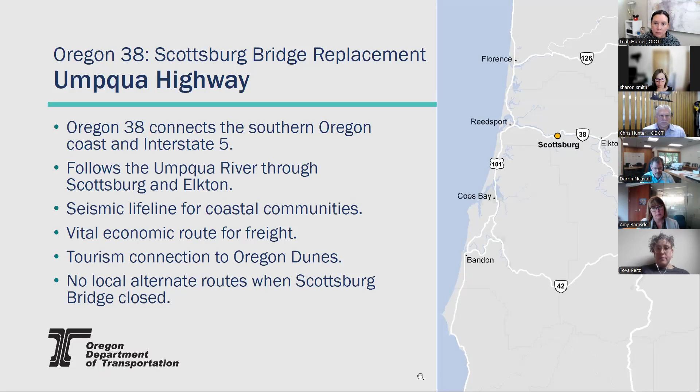Location-wise, it's just 16 miles west of Reedsport, right along the Umpqua River, in the community of Scottsburg, which has about 200 people. There are neighborhoods at the north end of the bridge, and this is a very steep, vertical area on both sides. We'll talk a little about that in the design.

Also, if you look in the right-hand corner picture, you'll see a boulder. There were a lot of those in the river. As we were investigating this, we noticed those came from the hillsides and had come down through the years, so there was definitely evidence of past earthquakes and slides through this area.

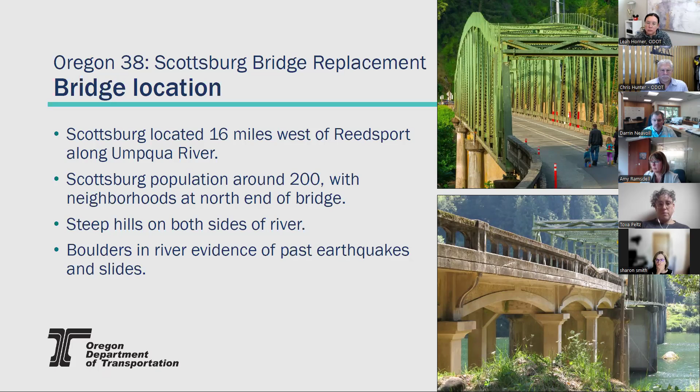So what was the problem? It was originally built in 1929, with little space for bicycles, pedestrians, and even two-way traffic. It was tight for two-way traffic through there, especially as you enter the bridge. Crashes required bridge closure for repair, and even maintenance work sometimes caused us to close it because we just didn't have the room. The bridge was also vulnerable to earthquakes—it just wasn't built for that.

On a personal note, I'd say it saved my hearing probably, because my wife, every time we took our camp trailer across there, would be hollering at me to slow down or move over. Our maintenance crews constantly picked up mirrors and awnings off this bridge because camp trailers would hit either the bridge or a passing vehicle and lose their mirrors or awnings. We even had awnings down in the river. It was a real problem.

The crash you see in the picture happened in 2014-15. This closed the bridge for about a week. We were very concerned about whether it would need to be weight restricted after it hit, because it hit so hard. This really was the last big crash that got people around the area concerned about needing to do something with this bridge.

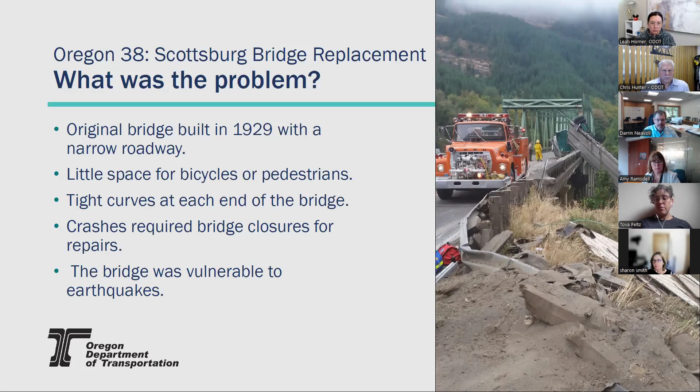All right, next slide, I think. I'll let Chris take on what we did, what the solution was, and how we got there. So as Darrin explained, this is a rural area with a tight corridor.

We were looking at this, and it did have tight corners into this bridge. So, even because of the size of it, we did a value engineering process, looking at alternatives for what we should do with this structure. As House Bill 2017 came in, it provided funding so we could actually replace the bridge rather than continue just providing repairs and maintenance. We had the value engineering study, and there were 50 plus different ideas that we vetted through the process—several of those we did implement.

There were also recommendations to replace the bridge with a more modern bridge, a wider deck, and standard shoulders to accommodate all modes of traffic, which the prior bridge did not have. The new alignment was meant to take out some of those sharp curves we had on both ends, but also to provide clearance for maritime traffic. We had to coordinate quite a bit with the Coast Guard and others to make sure we were meeting their requirements.

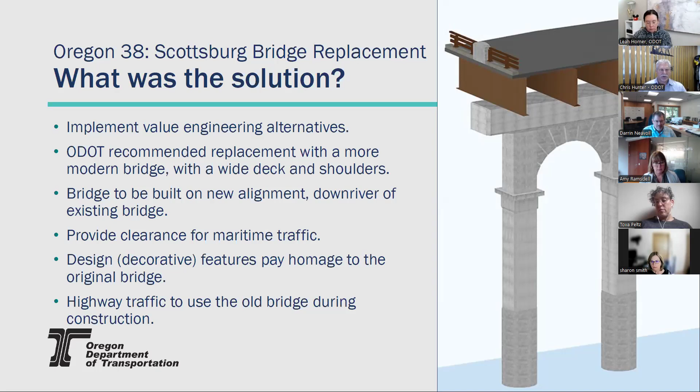This is just an overview of what that looked like. The green was the old original Scottsburg Bridge, the 1929 bridge. It's kind of to scale, so you can see how narrow that bridge was in comparison to the new bridge on a new alignment.

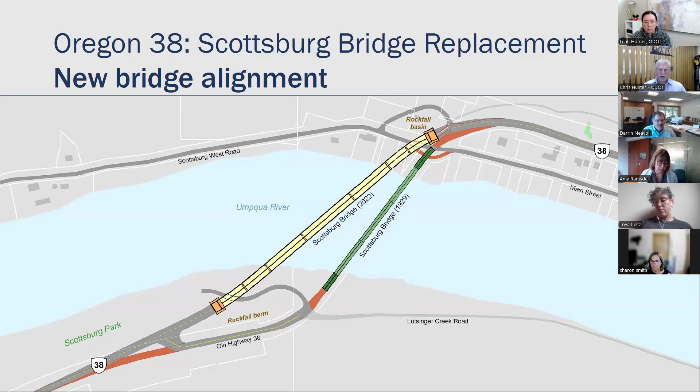With our design, we were able to completely build this new structure, the approaches, the attachments, pretty much everything, prior to opening up the new bridge and decommissioning the old bridge.

For the project scope, we built a new bridge, and when they did that, there were two temporary bridges that needed to be constructed. This picture shows you one of them, the temporary bridge used to build the new structure. But we also had to put in temporary bridges to decommission the old bridge, downstream of the old bridge and upstream of the new bridge. We had to shoehorn in a couple additional work bridges when it became time to remove that existing structure.

On the south end, the lower left of this structure, we had to realign our highway to meet the new alignment of the new bridge, but also tie in Lutsinger Creek Road, which is on the right side that continues up the river. We did some modifications on the north end as well, because Scottsburg West Road and Main Street come under the bridge, and there's also a little shoofly you can see. We had to build a retaining wall and make some modifications up there to accommodate local traffic within the community.

We also utilized what we call deep soil mixing, basically stabilization of the existing ground, where you drill down into it and inject grout and cement to firm it up and make a solid base. We did that to help with liquefaction issues during a potential seismic event. Being along the river with this type of soil, we need a really good foundation, so we looked at various types of foundations and landed on deep soil mixing to stabilize and create this foundation using the existing soil with additional grout to make it solid and no longer subject to liquefaction, so the foundation of the structure would remain in place.

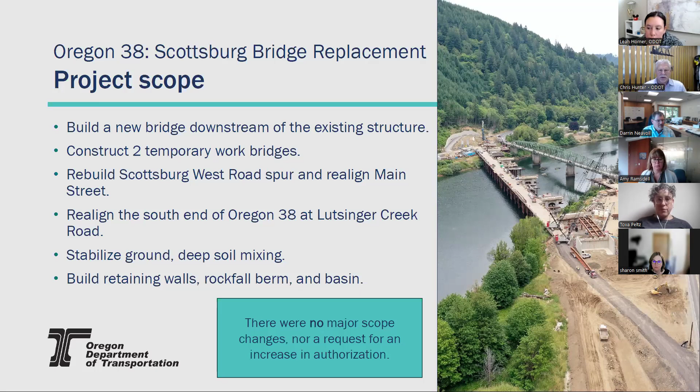As Darrin mentioned, for that seismic resiliency piece, we built a rock berm. One is on the south side of the bridge, in between the two alignments of the road. Then we have a big catchment on the north end for rockfall. As Darrin mentioned, there are a lot of rocks out in the river that we determined have come down off these steep hillsides. So from a seismic resiliency standpoint, we landed on how to protect this bridge: a large berm on one side to protect against rocks coming down and hitting the structure, and on the other side to try and catch them. Those were some features added to this project as well.

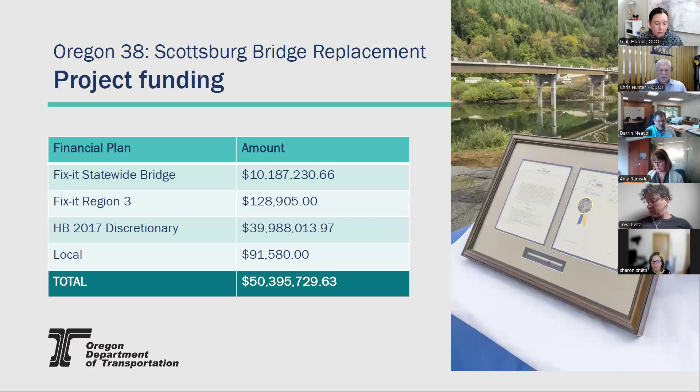So continuing with project costs, looking at that design phase, engineering was just under $3 million. We had right-of-way costs of 1.4, some utility relocation and other costs that were almost 300,000. And then the other phase, which is 150,000, is some of that historical mitigation.

And we're working on some of those designs now. We have, in essence, a kind of display board kiosk that we still have to install on this project as part of the historical mitigation that'll talk about the historic bridge, some pictures, some other things. And so that work is yet to be completed, but those designs and contracts are underway. And so total design was almost $5 million. Again, the 45 million total for construction, and then the project total of 50.4 million.

Next. Chris, could you go into a little more detail on the historical mitigation you're planning to do? Yeah, so there's a lot of pieces that go into historical mitigation. Some of it is just the features. Even in this picture that you see, the old bridge had some arches, some other things in it. And so we incorporated some of those features, arches, lines, some of those aesthetic features up on the bridge rail, where the bridge rail attaches in between the metal rails itself. We've got, again, arches, some lines, some aesthetic features.

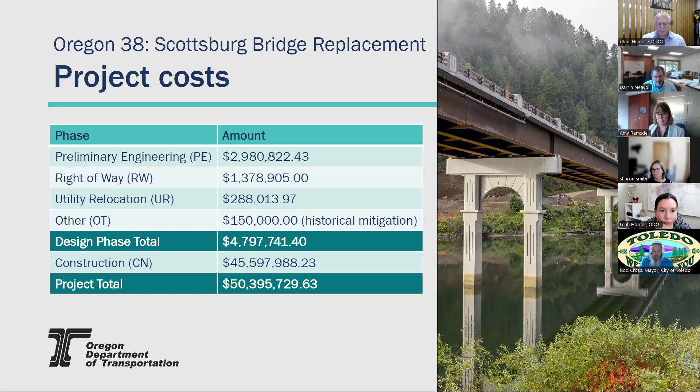Yeah. I'd also add that our historical staff did an amazing job coming down, meeting with the community. I think they met 2 or 3 times there with the community, just having them bring in the old pictures and stuff. And they collected all that information. And so we have that history. Yeah, the community is definitely tied to the history of Scottsburg. And so, definitely lots of information they provided for us. Next slide.

So this is the funding breakdown on the construction side. Our original contract was $39.5 million. We only had 2 bidders on this project. The next bidder was significantly higher than that. This is the low bid. We had anticipated items around $222,000, a contingency of almost 1.8, construction engineering around $4 million. And so an original construction budget of 45.5, almost $45.6 million.

And fortunately, we're able to stay within that. We haven't had to get any additional increases of authorization for the construction of this project. And so we've remained at that original authorization of the $45.6 million. Next.

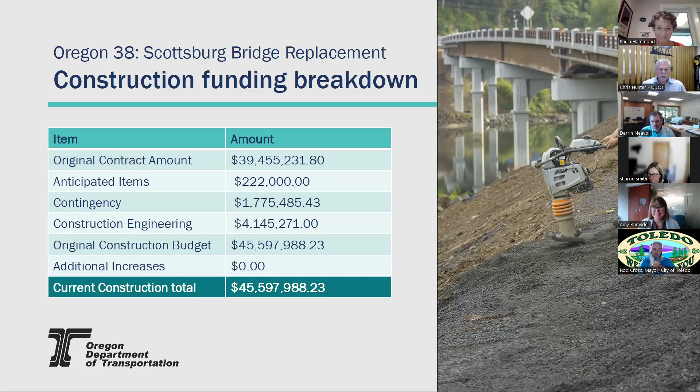Looks like Paula has a question. Oh, go ahead, Paula. Thank you, Chris. Can you tell me how you set your contingency? Generally, our contingency is like 3.5% of the biddable items. And depending on the project and some of the complexities, we can adjust that a little bit. Sometimes we'll go to 4.5, depending on concerns we may have, but on the majority of our projects, it's 3.5%. Okay, thanks. You bet. Next.

Touch a little bit on the civil rights aspect of it and some of the goals. We had a 4% goal assigned to this project for the utilization of disadvantaged businesses. We actually achieved almost 8%, so we almost doubled our assigned goal, which is great. I think in the letter we mentioned that we have a statewide goal overall of 20%. We do struggle in rural areas. Sometimes, one meeting maybe even a 20%, but trying to get sometimes around that 6 to 8 to 10% is a struggle when we're working in rural areas.

And so a lot of times our projects will have smaller goals. We're trying to push that envelope on newer projects these days, and we're trying to apply 6 to 8 to 10% now on most of them. This one had a pretty low goal at 4%. But like I said, we achieved almost 8%, which was great.

Ted, do I see your hand up? I think you're on mute, Ted. I'm sorry.

I understand there's a number of claims on the project. Your 45 million, does that include any of the money that's there in claims, or is that on the side? No, that does not include any potential for claims, and I'll touch on that in a little bit. Okay. Thank you.

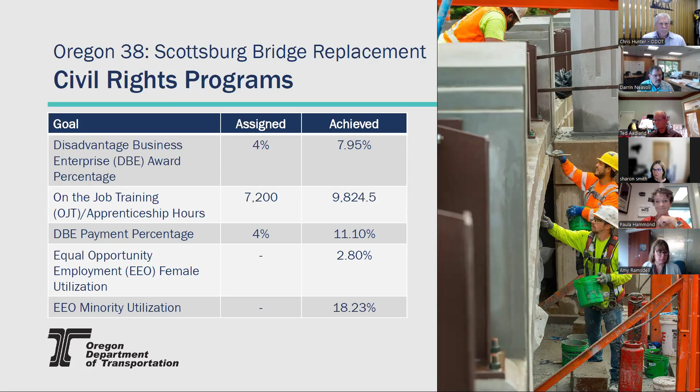So the schedule: we started design in September 2015, and it seems like a long time between '15 and '19. But for a project this large, it takes some time dealing with some of the geotech aspects. You're building over a river, this is a really long bridge, the seismic components and investigation. And so we spent a good amount of time preparing the design.

We got it out to bid in November of 2019 and issued our first notice, which is telling the contractor, go to work, start submitting all your required information and documentation, and let's get going. That was in February of 2020. And we had an original completion date of August 31st of 2022. We actually didn't complete this project until we issued the second notice on October 25th of '23. And I can get into some of that right now.

So in essence, we got the project underway. We have really tight in-water work periods. There was a lot of work to be done. We did get this structure open to traffic in July of 2022. Part of the premise of that was also that we had the World Track Meet up in Eugene. We were trying to get projects open. We didn't want to hamper any of our highways. So working with the contractor, we did some acceleration to get the new bridge open sooner. And we were able to achieve that.

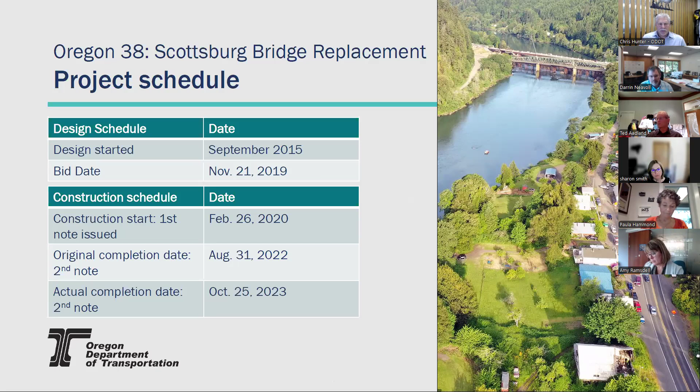So, challenges. We worked through the pandemic. That was a challenge. There were a few times that the contractor's team had caught COVID. Some subcontractors had caught COVID. Some of them managed to still work, even if they had COVID. They were trucking in material, so they continued to truck in material, but weren't exposing themselves to anyone else. Trying to maintain safe distances, all those things through the pandemic, provided a challenge, but we did continue to work on this project, and overall we were successful without getting everybody sick and having major shutdowns on the project.

As mentioned earlier, we have tight in-water work periods, July 1st to August 31st. And so that two-month time frame to build the work bridge and build the foundations of the new bridge is not a lot of time to do it. And that's why this was a three-season project to start with, because you've got to get that work bridge in first, then you need a season to build the new bridge, and then you need a season to get everything back out. We worked through that fairly well, but it definitely provided some challenges.

Trying to decide on the level of seismic resiliency. Like I mentioned, we built some large berms. You can kind of see a little bit of one starting in this picture on the lower right; that's actually where the hole is. There was a pile of material there. That's been excavated, so we've actually got a hole in that location, but we have a large berm on the other end of that bridge. Because again, we're looking at all these boulders we saw in the river. Where did those come from? We made some determinations. They came off these hillsides.

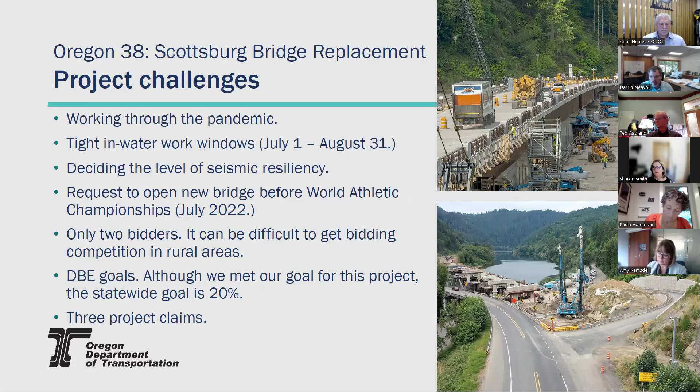Next slide. So what went well? Overall, the bridge itself went really well. We've constructed a seismically engineered and aesthetically pleasing bridge on a priority lifeline route that's critical not just to the community, but all the surrounding communities. And as Darrin mentioned at the beginning, just that commerce, that vacation travel, this highway is used a lot by a lot of people to get to and from the coast. And so, we were very successful in that.

We eliminated some safety concerns on the old bridge. We'd strapped wood posts to some of the metal beams at the end just because that bridge got hit so much by those awnings and mirrors. We put sacrificial wood beams on the end to take that impact rather than the bridge. And I think the last accident we had, I think Darrin was referring to it, it almost collapsed this bridge.

And so that's how concerned we were with the viability of this bridge remaining in place, because we had to shut it down. Initially, we were allowing smaller local traffic across it, and ultimately, after working with our engineers, we had to shut that down because they were concerned that this bridge was going to collapse until we could get in there and get the repairs done to strengthen it back up. And so that's how vulnerable that was. And so definitely successful in building a new bridge.

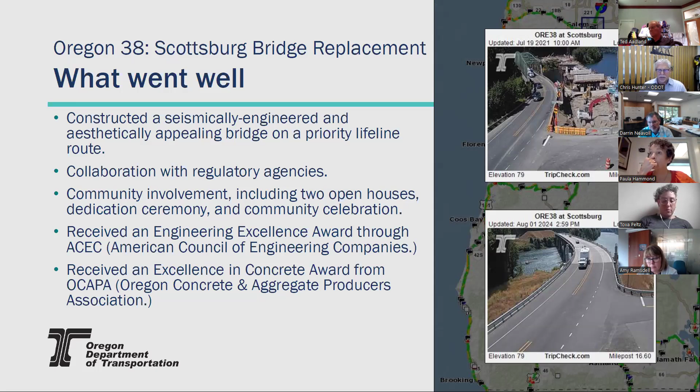So you might, on the next slide where you talk about lessons learned, it may be a note on a follow-up or lessons learned on the project is to flag how you're going to estimate unique features. Ted mentioned the soil mixing, right? Things like curved steel members and distance from plants, those kinds of things. Seems like a unique kind of a bridge, and it's beautiful, by the way. But those are going to require different techniques in estimating or at least recognition of the risks there.

Yeah, and some of that plays into that is we do have suppliers that are closer, but that's not the suppliers they used. And so some areas, we got really good prices, lower than our estimate. Other areas was higher, but those were definitely some of the significant areas where within our estimate, we missed it, in all honesty. So that really kind of accounts for that $6.8 million of additional cost. Ted, looks like you got a question too.

Yeah, Chris, just real quick, you used weathering steel Cor-Ten on the girders. Isn't this beyond the zone where ODOT was not using Cor-Ten because of the salt air? Or was it not? No, what we'd found, even in this area, as long as we're not coating the entire thing, we're still okay in this area. We're just kind of right at that tidal influence area, which is why the Coast Guard's jurisdiction ends just downstream of that. And so we weren't totally concerned over that aspect, Ted. But we determined that this would be just fine and weather just great in this area. Okay, thank you.

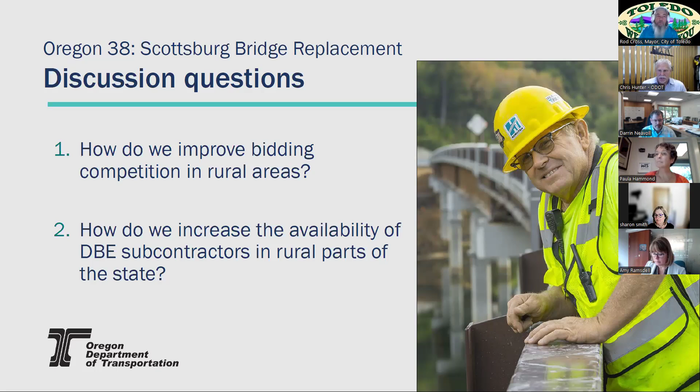If there's any way to improve that pre-bid communication so that people have the best information they can have. Yeah, and I appreciate that. And on this particular project, we did have a mandatory pre-bid requirement. So we put notice out to contractors ahead of time, made them come to a meeting so we could walk through what this project is and some of those concern areas. And so we did have that on this particular bridge, and we had quite a few contractors show up to that.

But as you get into those rural areas, especially on the South Coast, we have a lot of projects that bid with one bidder. It gets difficult when you have just Knife River in an area, you got Tidewater in an area. As you go further south, it's a long trip for other contractors. So yeah, it does get difficult. And we do a lot of things trying to develop and provide material sources. So maybe if it's a paving job, we have material available that we can give them out of our own sites to try and increase that competition. So we look at various areas that we can help with that, but it's still difficult. And then you got to have a contractor that's willing to utilize those.

Would it be worthwhile to reach out to some of the ones who attended the pre-bid but didn't submit a bid, and see if they can give you some reasons they weren't interested, and maybe there's some ideas there of what you could do different? Yeah, possibly. I can tell you some of it.

It depends on where the job is, and that was a tough site. You go down there as a bridge builder and look at all the boulders, the hard bottom, all the stuff you have to consider, how far you are from your sources. You've got to really think hard about whether this is a project you want to take on. At the same time, you're looking at what else is bidding in the area, and deciding whether to go after this one or another one. What's going to be the easiest, the best, where do I go? So as a contractor, you're looking at multiple things.